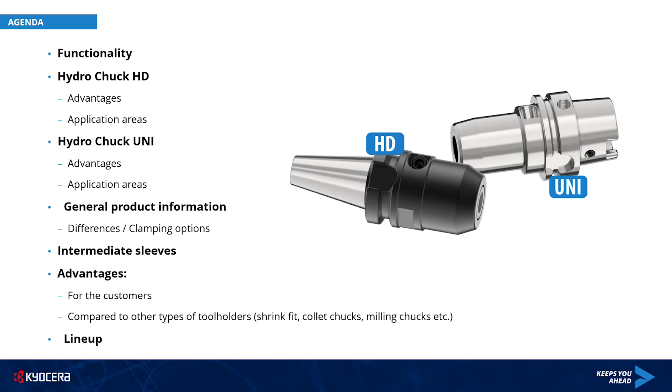Coming to the functionality, here we can see an image of the HydroChuck. In this case it is the HydroChuck Uni, but the function of the HD is the same. Marked with position number 1 is the clamping screw. This screw is simply tightened with an Allen key to dead stop.

Number 2 is the clamping piston. It compresses the fluid into the oil chamber system. Then the expansion sleeve clamps the tool shank, centering the shank first and then clamping it powerfully and uniformly over the entire lateral surface. Additionally, the fluid has a damping effect on the tool. The wear on the cutting tool is minimized, and the tool life increases by up to 40%.

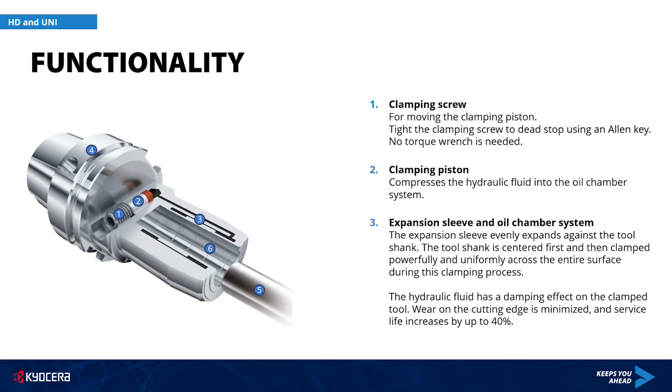Finally, we have the dirt grooves, which have a very important function. The high clamping force of the HydroChucks has the effect that oil or grease remaining on the shank of the tool are pressed into the dirt grooves.

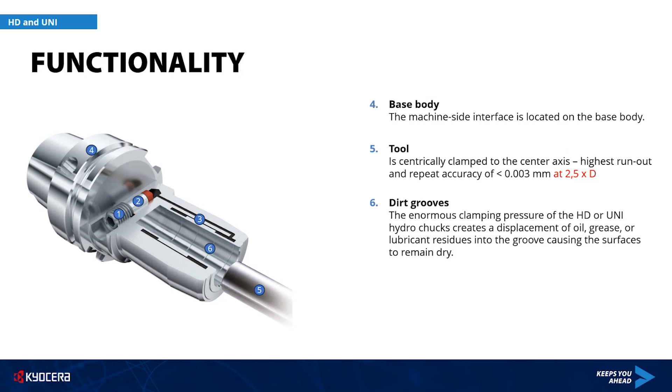So here in this animation, you can see again how the process works. You need nothing more than an Allen key to clamp the tool, quickly and reliably, with maximum clamping force. We don't need any additional clamping devices. It's a short setup time, which saves costs at the end. And of course, all common shank types can be used.

One more thing it is important to mention: the tool which we want to clamp must be pushed all the way to the rear. The HydroChuck has a length adjustment screw with a range of 10 millimeters, which sits here. It could happen that the holder could be damaged if the tool is only inserted at half of the depth, and the correct clamping force would then not be ensured.

Let's imagine, for example, if we clamp the tool halfway like this. Due to the enormous force that the holders have, the expansion sleeve is loaded unevenly, which could lead to deformation. So please pay attention: always push the tool to the end.

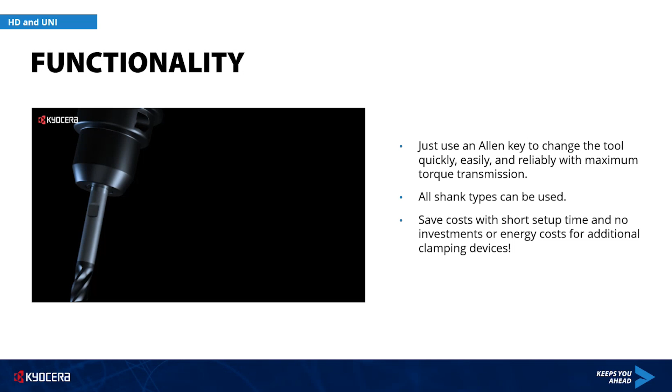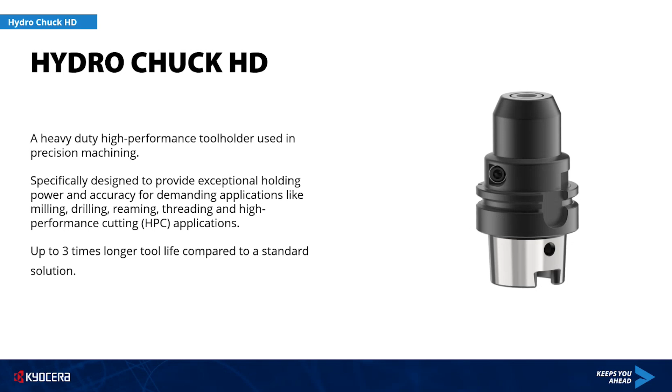Now we come to the HydroChuck HD. HD means nothing more than heavy duty. This tool holder was designed to achieve a high material removal rate with maximum clamping force, but without ignoring precision. Due to its anti-vibration effect, the HD has up to 3 times longer tool life compared to conventional tool holders.

These are the possible areas of application for the HD. It is especially suitable wherever a lot of material is removed, like rough milling and heavy machining, but it's still good in areas like finishing, drilling, or reaming.

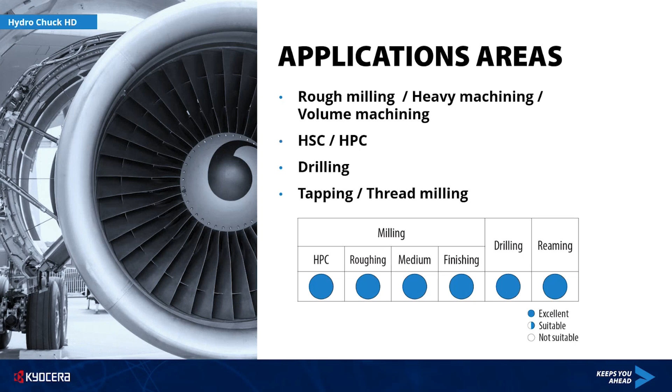Now we come to the advantages of the HydroChuck HD. There is a lot of text, I don't want to read that completely, but I would like to point out a few aspects in detail. On the one hand, the extremely high torque transmission. We have the high radial stiffness. Due to the compact design of the HD, we can achieve very good results even with a longer tool overhang.

Then high flexibility when it comes to clamping different diameters by using intermediate sleeves. The tool holders are balanced as standard with a quality of G2.5 at 25,000 RPM. And we have the excellent anti-vibration damping, which increases tool life.

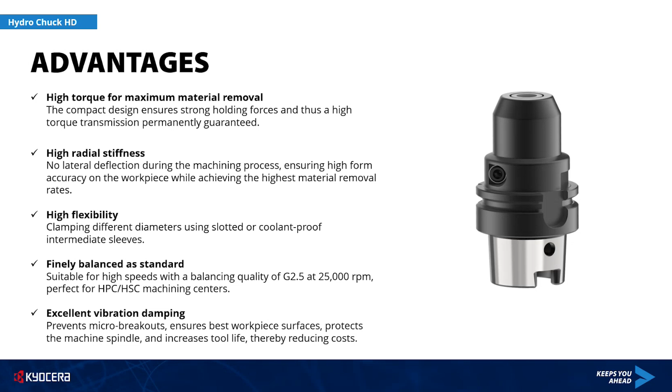Then run-out accuracy with less than 3 microns at 2.5 times D. Some manufacturers of tool holders also advertise a good run-out accuracy, but not at 2.5 times D. So we are somewhere at the front of the tool holder.

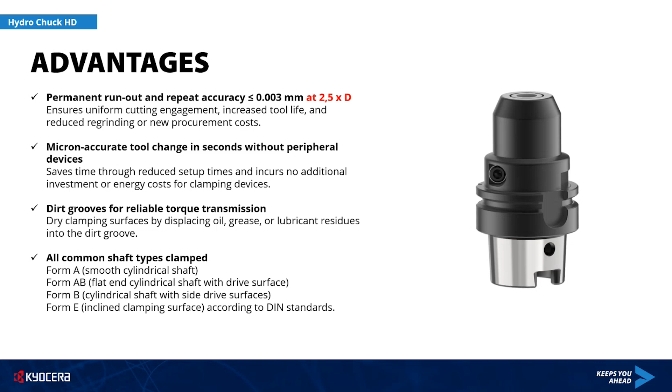Then we have the fast and micron accurate tool changes in seconds without any additional equipment. And of course, we have the dirt grooves for reliable torque transmission, and all common shafts can be clamped.

Coming now to the Uni tool holder, it is the best when it comes to price performance ratio in direct clamping, with 7 interfaces and direct clamping from diameter 6 to diameter 32.

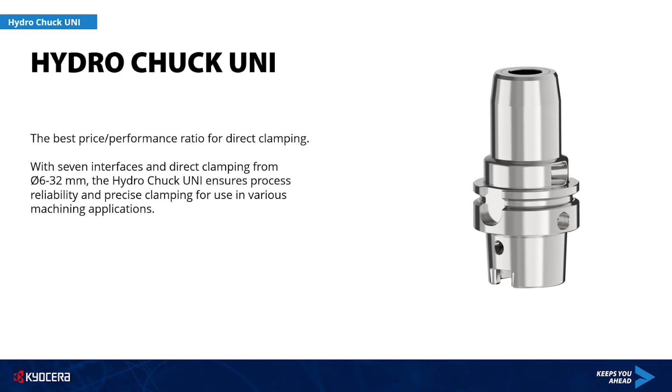The application areas of the Uni - as you can see, the Uni is not suitable for heavy machining because of its slim shape. Its strengths are in applications like drilling, reaming, or finishing.

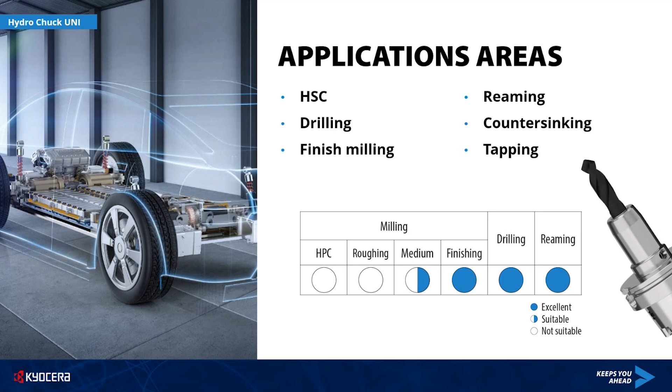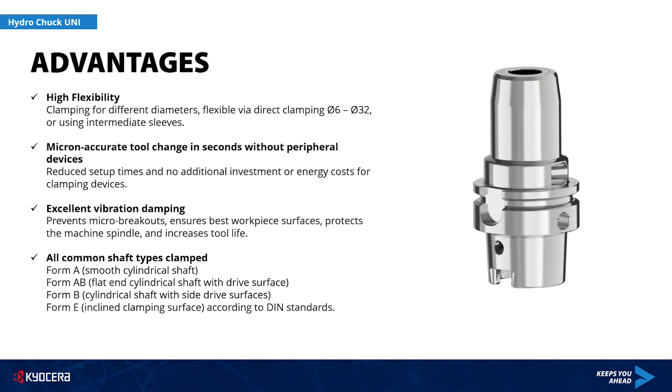The advantages of the Uni are quite similar to the advantages of the HD. We have high flexibility for clamping different diameters by using intermediate sleeves, or directly from diameter 6 to diameter 32. We have fast tool changes, which saves us time. We have the anti-vibration effect here as well, and all common shaft types can be clamped.

Balancing is also standard. We have permanent run-out repeat accuracy with less than 3 microns at 2.5 times D, and of course, dirt grooves for reliable torque transmission.

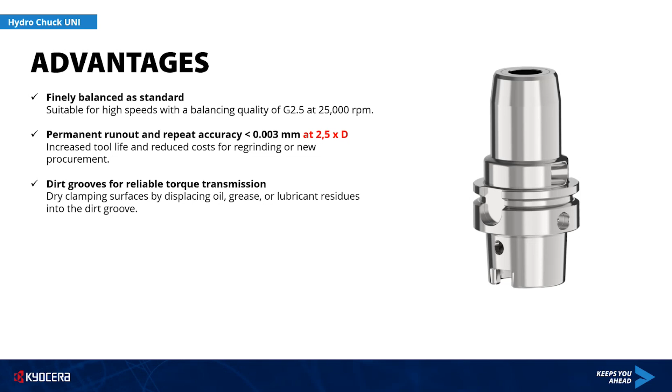So now we have seen all the advantages of the HD and Uni, and we notice that they are quite similar, but where are the differences? We can see the shape is a bit different.

The HydroChuck Uni is very flexible in direct clamping, and the shape is in accordance with DIN norm. The HydroChuck HD is optimized according to technical aspects, and the shape does not comply with DIN norm. It has a high torque for maximum material removal and high radial stiffness.

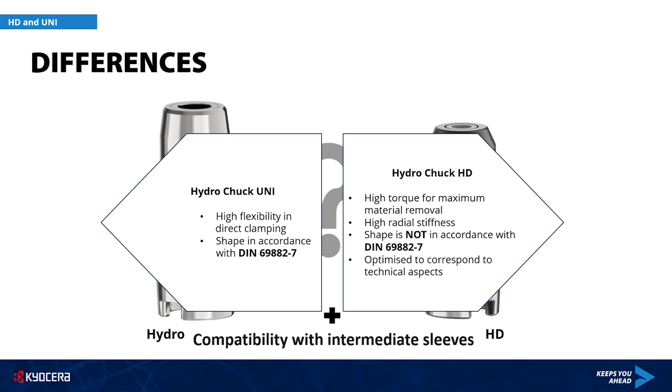Both tool holders are compatible with intermediate sleeves. Here you can see the outer diameter of the HD is 1.25 times bigger than the Uni.

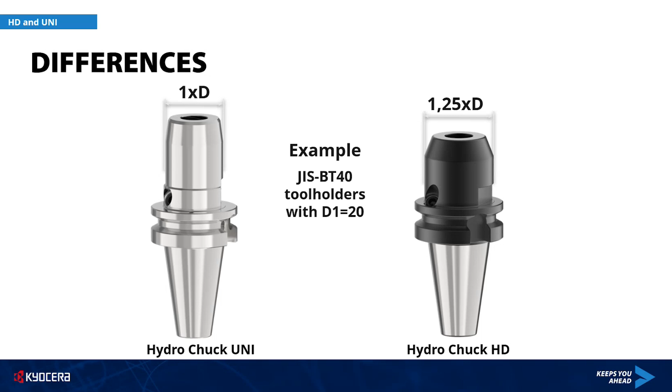Coming to the clamping options, what is possible? We can clamp directly - straight shank, Weldon, Whistle Notch, doesn't matter - any type of shank in accordance with DIN 1835 or DIN 6535 can be clamped, or we can use intermediate sleeves to clamp intermediate diameters.

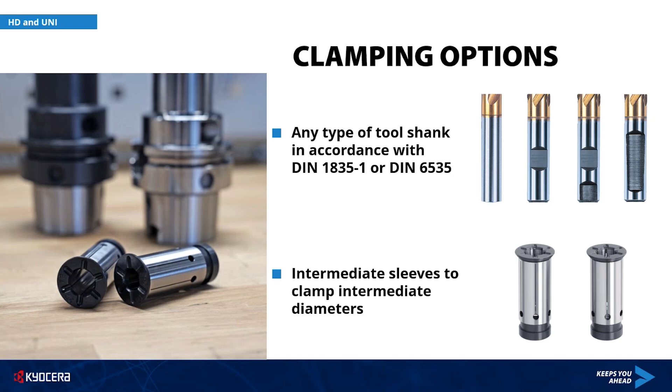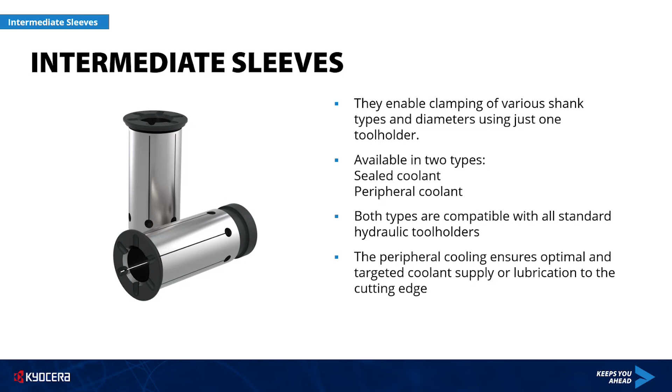Coming to the sleeves - they enable clamping of various shank types and diameters using just one tool holder. The sleeves are available in sealed coolant and peripheral coolant types. Both types are suitable for all standard tool holders, and the peripheral coolant type ensures optimal coolant supply directly to the cutting edge.

This is a rough overview of the lineup of intermediate sleeves. The peripheral coolant type will be available in external diameters 8, 12, 20, and 32, with internal diameters starting from 1 millimeter up to 25, depending on the external diameter of the sleeve.

The sealed coolant type is available in external diameters 12, 20, 25, and 32, starting with an internal diameter of 3 millimeters up to 30. Here as well, it depends on the external diameter.

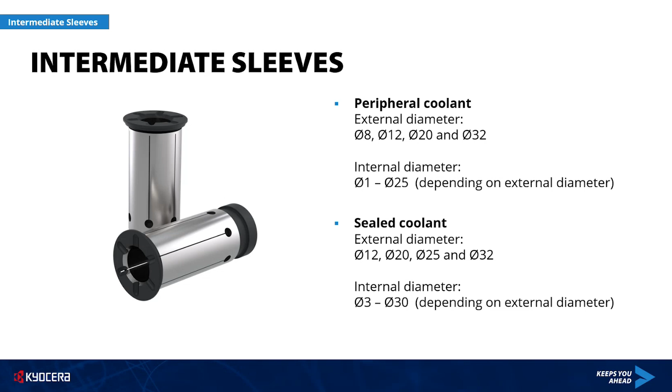So peripheral or sealed coolant - which one do I use? On the right side, you can see the sealed coolant sleeve. This means the sleeve is closed - the coolant cannot get through the sleeve. The coolant comes through the cutting tool directly to the cutting edge. This type is ideal for drilling, for example.

The peripheral coolant on the left-hand side is slotted. The coolant flows from the outside along the tool. This is especially suitable for milling.

Now we come to the advantages for the customer. The chucks are easy to handle - you can quickly change the tool in seconds without any additional devices. Here you can see a shrink fit device that costs around 10K. It saves energy and is CO2 neutral. The operator doesn't need any additional training, there's no waiting time, and it prevents mistakes. And of course, we have no risk of injuries.

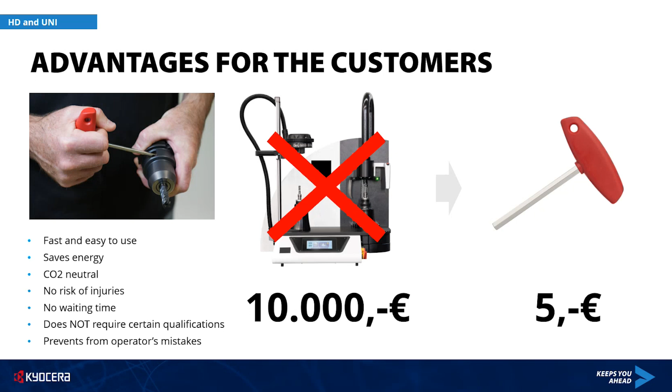Let's compare to the shrink fit holders. The hydro chucks are easy to use. We don't have heating or cooling cycles, which makes tool changes fast and safe. There's no thermal stress - heating up and cooling down again creates thermal stress on the tool and holder, which reduces tool life.

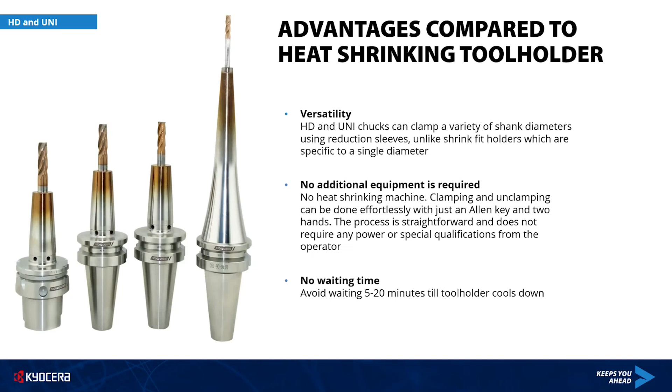And we get a longer life cycle - lifetime can be 3 to 5 times longer than shrink fit tool holders. Then there's versatility: because of the intermediate sleeves, we can clamp different diameters with just one holder, unlike shrink fit holders, which are specific to a single diameter. There's no additional equipment required - we just need an Allen key, and we have no waiting time.

Then the comparison to ER collets and milling chucks. In general, ER collets and milling chucks have worse run-out accuracy. We have better balancing - hydro chucks offer better balancing quality of G2.5 as standard. And we have better clamping force, which ensures secure tool holding even under heavy cutting conditions.

Here as well, we don't need any additional tools for clamping - no torque wrenches or assembly stations are needed. And ER collets and milling chucks have no vibration damping effect. This means we can expect better results and a longer tool life.

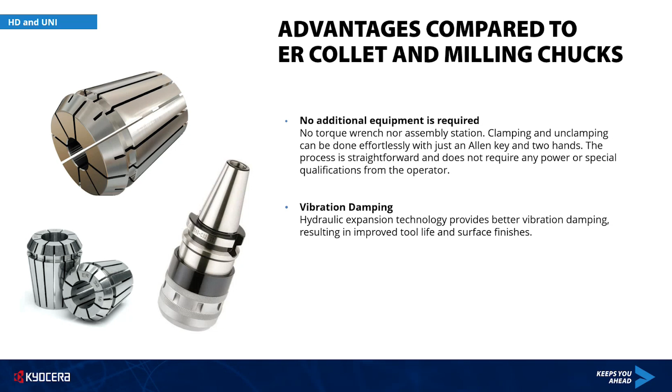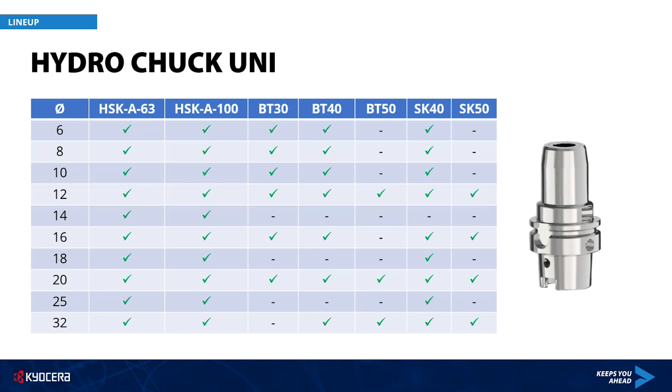Coming now to the last topic of the webinar - the lineup. I will not go into detail because you will find the whole lineup, including the sleeves, later in the brochure. Roughly, the Uni will be available in 7 different interfaces, with diameters starting from 6 millimeters up to 32. The HydroChuck HD will be available in 6 different interfaces with diameters 12, 16, 20, and 32. But we are still very flexible when it comes to clamping different diameters because of the intermediate sleeves.